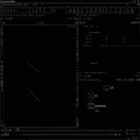But first let's talk about this new feature, and to show it to you I'll drop down a grid, dive in there and maybe scale back the grid to be 2 by 2, and also drop down a box. Just ghost this and move up the grid so it sits on the top face of the cube here. Next I'll highlight the box and drop down a Vellum configure strut soft body, to which I'll attach another Vellum constraint. Set this to attach to geometry and wire in the grid in the third slot up here.

Also in my box I want to set the primitive type to a polygonal mesh and let it set at a default 4 by 4 by 4. Let's just drop down a Vellum solver here really quickly, and in the solver itself just increase the substeps to 2 and dial back the constraint iterations to say 20. In the attach constraints, the only thing I want to do is dial back the stiffness to a really low value like 5 for example, and then simulate this. So this runs quickly and it bounces there, it just dangles. That's pretty much what we'd expect.

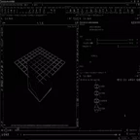So let's just go up one level and copy this whole grid here, paste it, and then translate it a bit to the side so we can compare solver settings. And what I want to do in this simulation here is in the Vellum attach constraints, I want to check stiffness drop-off. That's the new feature I've been talking about, and increase its value to 0.8.

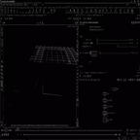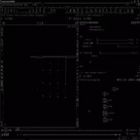What stiffness dropoff does, it takes the stiffness of these constraints that we created here, and checks how far they are from their original position, and multiplies their stiffness by a factor, which is 1 if the constraints are at their original position, and 0 if the constraint reaches this distance from its original position. So the further a constraint stretches out, the less stiff it is, and this simulates a physically plausible behavior in springs, because you cannot stretch out a spring forever. At a certain point it'll lose its stiffness and basically break.

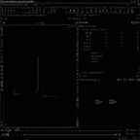So let's highlight the Vellum solver, quickly save this, head up one level, and simulate both cubes here. Let's just toggle real time here and play this. And you can see while this cube keeps bouncing for almost forever, this one here eases into its final position. So this one here looks physically more plausible.

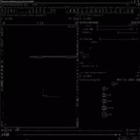Also we can very well combine this stiffness drop-off with the actual breaking of the constraints. So we can simulate a rubber band or a spring that's been stretched past its breaking point, so it releases. So let's do that by building a bit more of an elaborate setup, but again starting out with a grid, which again we'll scale to 2 by 2 and move it up to 0.5 units. Also I want to increase the rows and columns to say 30 by 30, and then drop down a box. Again, set this box to be a polygonal mesh.

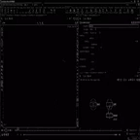Later I'd like to create constraints, ropes between the box and this plane here. So let's move down the box a bit, like this, and to be a bit more organic, let's rotate it slightly, that should do it. Also I want to have all my grid points in a group, so let's use a group node, which I'll set to points, call this one fixed, and put all the points in this group. Let's check like this, perfect.

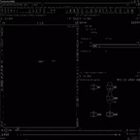Also let's give those two geometries a name, either using the name SOP or writing a bit of primitive wrangle code. I'll just use the name SOP for now. Let's call the first one piece 1, and the second one piece 2. And then merge both geometries into a single stream. Let's highlight this here and head over to the geo spreadsheet, checking primitives.

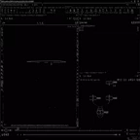I've got my two geos called piece 1 and piece 2, and also I've got my point group fixed, so everything is fine. Next I want to generate two groups in this single geo stream, one called soft bodies, that's my grid and my cube here, and one containing the ropes that we'll create. So again, using two group SOPs, set to primitive, first create a group called soft bodies, I'll put everything coming in this stream into this group.

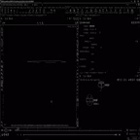And as I'm going to create a few wires, which I'll call ropes, I want to make sure that this geometry here is not part of the ropes group, which I'll create later. So just make sure by creating another group, this time calling it ropes, and excluding everything from that group. So we have a group called ropes, which has 0 members, and a group called soft bodies, which has all of my primitives in this geo stream.

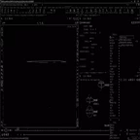Now to create those ropes, I'll use the connect adjacent pieces. Wire in my geometry, highlight this, and slowly start increasing my search radius here. Let's just ghost this group here. I don't like this connection here, so yeah, 0.67. So I'm getting those connection lines here.

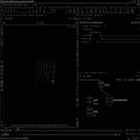However, one thing that's bad for the following simulation is that these endpoints here are intersecting, are on the same point as the soft body geometry's points here. So we'll have to move those rope endpoints a tiny bit towards the center of each rope. Let's do that using a primitive wrangle.

And in here, what I want to do is get the endpoints of each primitive. So I'm going to use a function called primpoints, which will return an array of all the points which are part of this primitive. So each rope is a single primitive. This will return the rope's endpoints. As I know that each of the ropes only contains 2 points, I can directly access each point's position here, because I know there will be 2 points in this array.

So I'll create a vector, which I'll call pos1. It should be equal to the point's P attribute, and the point is coming in through the 0 input slot, and it will be the first point of this array, so npts[0]. Let's just copy this line here, paste it again, call the second position pos2, which will be the P attribute of the second point stored in that array as the point with the index 1.

Next, to move those, I want to get a vector pointing from one point to the other, and I can get that by subtracting the position values from each other. So again, creating a vector, call this diff for difference. It should be pos1 minus pos2. And now I'll take a tiny bit of this vector and subtract it from position 1 and add it to position 2 to move both points closer to the center of each line. So pos1 -= diff * 0.01.

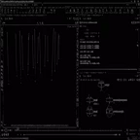Let's just copy these 2 lines here, paste them and modify them slightly. So for position 2, we want to add this value and then write this back to our second point, like so. And now I moved these points too, so before and after. So I slightly shrunk those lines. Next, I want to generate some intermediate points for those lines using the resample node, which I'll set to have a uniform sample length of 0.05 units.

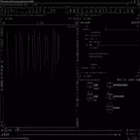Now, when I display my primitive numbers, I can see each line is its own primitive. And for what I've planned, I want to change this so that each of those subsegments is an individual primitive. Let's do that using the convert line node. So now each segment is its own primitive. And if you remember, I gave my main geometry names, so let's do that here too by just copying down that name SOP and calling these ropes piece 3. So all those ropes have the same name, piece 3.

Next, a few groups we need to take care of. The fixed group here.

Let's copy this one, paste it down here, and I don't want my points from the ropes to be in that group, so I exclude everything, and then my soft bodies and ropes group, copy those too, wire those in here. And I don't want my ropes to be part of the soft bodies, but I want them to be part of the ropes group, like this.

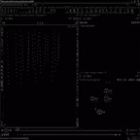Alright, I think we can merge both streams again. Let's just drag this down so it looks a bit more tidy, and merge both the soft bodies and the ropes. So this is what we have. Now everything that's left is basically setting up the vellum constraints in the vellum solver. So let's do that by first dropping down a vellum configure hair, which I'm going to use for the ropes here. Let's head up here and maybe drag this down.

So I want only my ropes group to be a hair. And down here, when I scroll to stretch, I want to set my stiffness to a rather low value of 0.5. Again, this is a value that I found out by trial and error after setting this up. Let's also enable the stiffness drop-off with a value of 0.2. Again, something I found out by trial and error and lots of simulations. Let's call the output group for the constraints hair stretch, and also let's decrease the bend stiffness a bit to 0.01. Later we can dial in the breaking and the breaking threshold, but I'll leave that unchecked for now.

So next let's configure our vellum soft body. And again, I'll take the strut soft body here, and Houdini automatically drops down those two nodes, the cloth and the struts. So let's set up the cloth first. Let's scroll up, and I want to restrict this to the soft bodies group this time. Also, I'll increase the mass a bit, so I have something dragging down on those ropes. And when we scroll down to stretch, this indeed all looks fine. Now for the struts. Again, I want to only affect the soft bodies. I'll check mass and thickness. And again, scrolling down, that all looks fine as is.

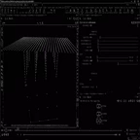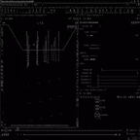So next, let's connect the ropes to our grid and cube here by using a vellum constraint again and setting it up to be a glue constraint, affecting only the ropes, and the target should only be the soft bodies like this. So here these little indicators indicate that only at these points and up here I have glue constraints created now. However, these here are a bit wrong, so let's just scroll down a bit and decrease the glue search distance to 0.02. Maybe for good measure increase the search points, although it shouldn't make that much of a difference in this case. And that should be it for the glue constraints.

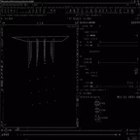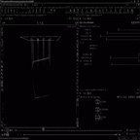Finally, I want to fix those points which are on this grid here, which I can do by heading into the vellum cloth and under pin to animation, select the fixed group here, and that should be it. Now let's drop down our vellum solver. And in here I want to increase my substeps to 3 and decrease my constraint iterations to 12. Let's just save this. Keep our fingers crossed and simulate this. Alright, so far not that different from our previous simulation except those ropes here.

Now let's add some breaking in those ropes here so they tear, which I'll do in the hair constraint here. Scroll down to the breaking tab and select breaking, and let's dial in the threshold. And there are several metrics that you could use to determine the stress type that's actually used to break those constraints. I tend to leave this set at stretch stress. You could also use the stretch ratio, but for now, let's just go with stretch stress. This is a really sensitive value. I think I had something like 0.00009. That's 4 zeros after the point. Let's just try and simulate this.

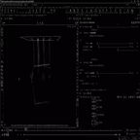Okay, so far no breaking, so maybe a bit more sensitive. Yeah, that was way too much. Almost. Getting closer. Yeah, maybe a tiny bit. Yeah, that's what I was looking for.

Alright, so that's how I use the stiffness drop-off in conjunction with a few constraints to build this cube or any other object you like that's been held onto some area by those ropes, which then as they stretch, tear. And thanks to the stiffness drop-off, behave physically more plausible. So, until next time, have fun, and it's cheers and goodbye.